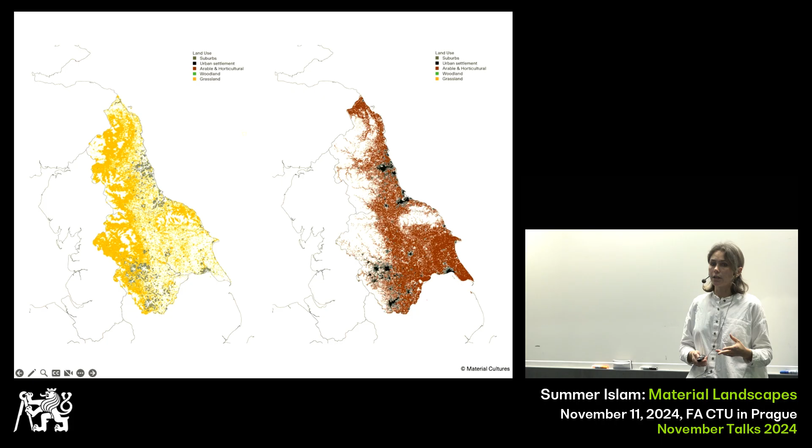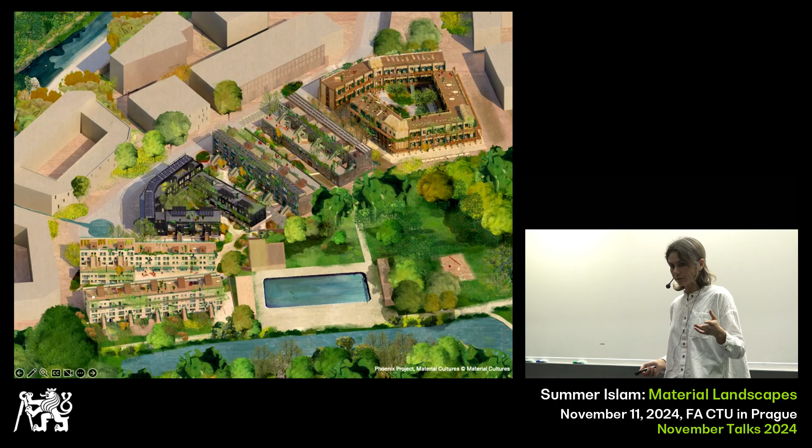Our work works through all these different scales. We work at the one-to-one, but also, as much as possible, we are interested in the impact of the work growing. So we work across large-scale housing developments, as well as hands-on fabrication and prototyping for design projects, but also working with our students to think about experimental and innovative building typologies with natural materials.

We teach, so we do lots of education work in architectural schools, but we also have a platform now called Make that we set up a couple of years ago, where we run building skills workshops, broadening the understanding and access to natural materials in construction and on construction projects.

As has already been said, we publish a lot of our work online and open source, but we've also recently published a book called Material Reform, which is a collection of essays looking at the destructive ecologies fostered by the construction industry.

Increasingly, the way we have come to conceptualize the work is to think about it in the context of the landscape, not just within which the project sits, but also from which the materials we work with are drawn. So I'm going to talk through a series of landscapes to articulate the project, and start to posit the connection that could be had between buildings and the landscapes they sit in.

So in farmland, we work a lot with straw. Straw, which is a stem of cereal crops, is very versatile. If you leave it in the field, it can be used for bedding, or it's often burnt, and then the carbon dioxide sequestered in the plant while it's growing is released back to the atmosphere. But by contrast, if you take that plant matter and integrate it into the building as a substitute for other materials, you could think of it very simply as a carbon battery or a carbon store.

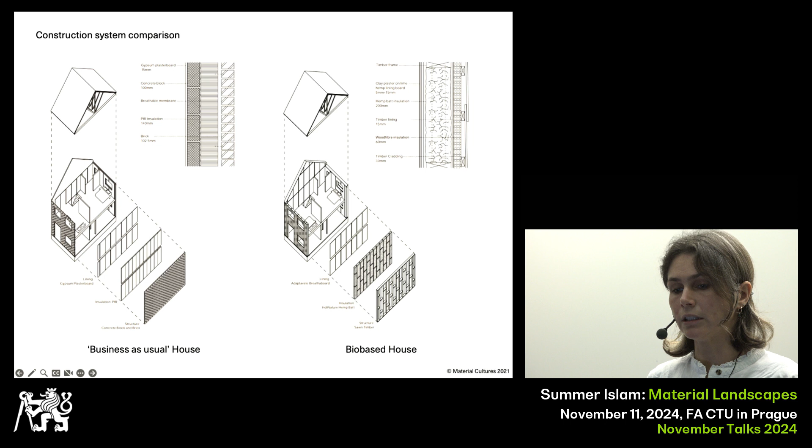So if you apply this logic to a house, in our research we found that if you substitute readily available plant-based building materials in a standard developer house like this one—buildings like this are built across the UK landscape—you could turn each individual house from a net producer of greenhouse gases to a kind of carbon negative unit of storage.

We've also looked at the amount of land you need to grow the plants required to do this work. What we found was that the land use is really negligible—it's a fraction of what's already going on there. There's lots of farming happening in the region more broadly, and the amount needed to produce materials to house the people looking for new housing is really, really small.

But the amount of economic gain for that whole region of the UK was massive, extraordinary. It's one of those things where you start to understand that this transition to a different material supply chain and a bio-based way of building is in lots of ways a no-brainer, and we're working at cultural barriers rather than technical ones.

Underlying this story of agricultural production is also one about how oil-dependent industrial agriculture has really desertified our rural landscapes. It's poisoned our soils and waterways and destroyed natural habitats, and you can see this in the biodiversity loss associated with extraction.

Surprisingly, most of this biodiversity loss is actually associated with farming. Today we're dependent on a handful of cultivars in our industrial farming landscapes and food systems, which makes them very vulnerable to pests, diseases, and also climate change.

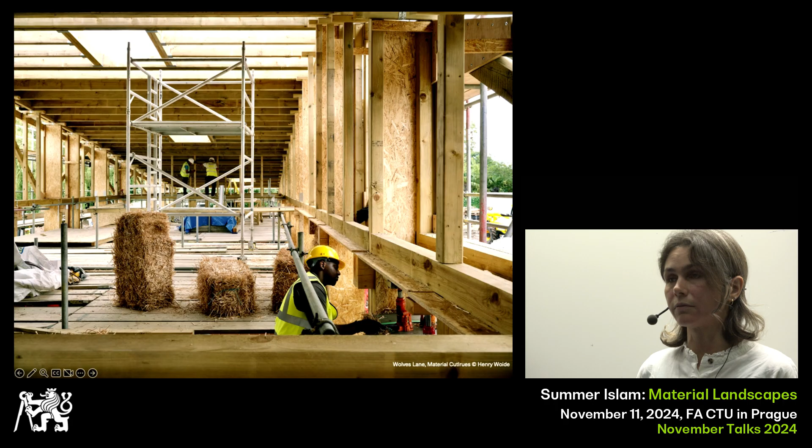The buildings were designed to be a tool for the learning and communication of the value of plant-based materials to the community. The project is rooted in principles of social justice, making spaces to practice, grow, and learn for those who have been historically marginalized in London.

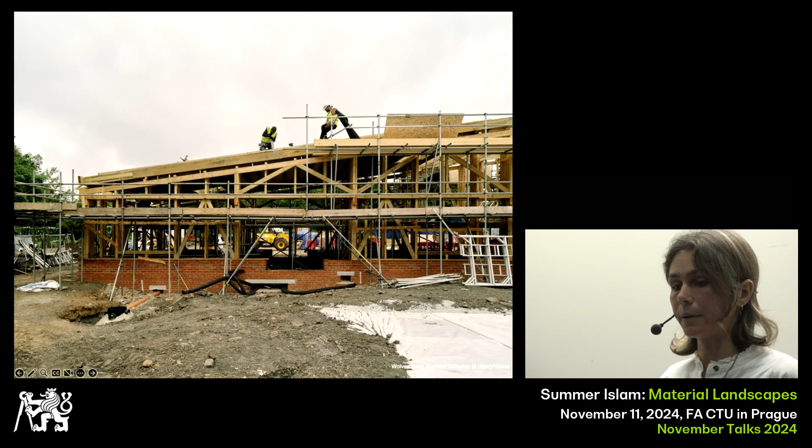Places like Wolves Lane are increasingly important as places from which to build community, knowledge, and enterprise. Through the project, we developed a participatory construction framework with apprenticeships, skills courses, and volunteer sessions. The construction has seen teams of different site users and volunteers exchanging knowledge and learning how to build together.

Direct contact with and understanding of materials, their properties, and what they feel like is at the center of how we approach design.

On this small dairy farm in Cambridgeshire, our client Steve Barron established Margent Farm. On the site, they looked at growing hemp for use in experimental biocomposite products, which could substitute plastics, basically. The same client commissioned this house called Flat House, a hemp-based flat pack demonstrator project which shows the versatility of hemp. The building takes the form of the existing steel frame barn and retains part of the structure to support a glazed hothouse and a climbing frame for the plants.

We established a new crop rotation. The hemp was sown in the fields which were previously wheat—it's actually a very good rotation between wheat and hemp. They kind of feed off each other.

And the very long roots of the hemp plant send carbon deep into the soil, but they also rebuild the soil structure. So it's a very good break crop.

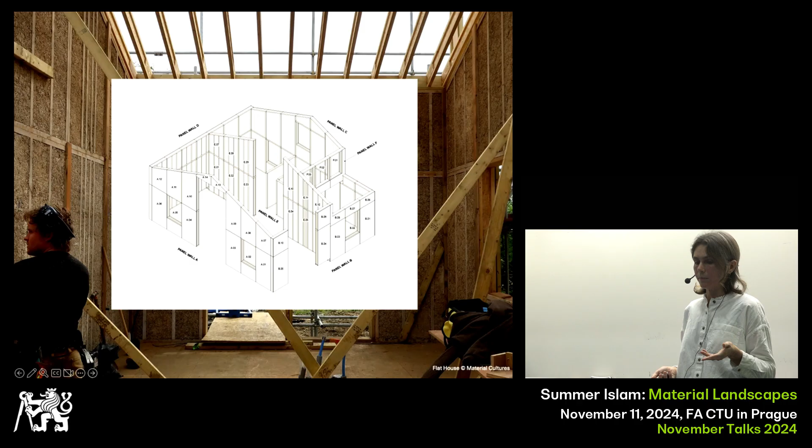And then it was sent to Buckinghamshire, where it was combined with lime and cast into these panels. We designed the system with our collaborators Will Stanwix and Oscar Cooper, and then we built the building with Henry Stringer very, very quickly, in about 2 days.

The cladding for the project was developed with Margent Farm, and then we made this new material product, which was one of the drivers for Margent Farm. It was combining hemp fiber with a sugar-based resin to make a corrugated rain screen.

And then internally, we worked to shift scales and, where possible, really just leave the hempcrete exposed so that it was something that was visible. Part of the way we think about materials in design is that when you can see them in the interior finishes, you have an understanding of how the building is put together, but you also have the ability to adapt, maintain, and intervene with the building throughout its lifetime.

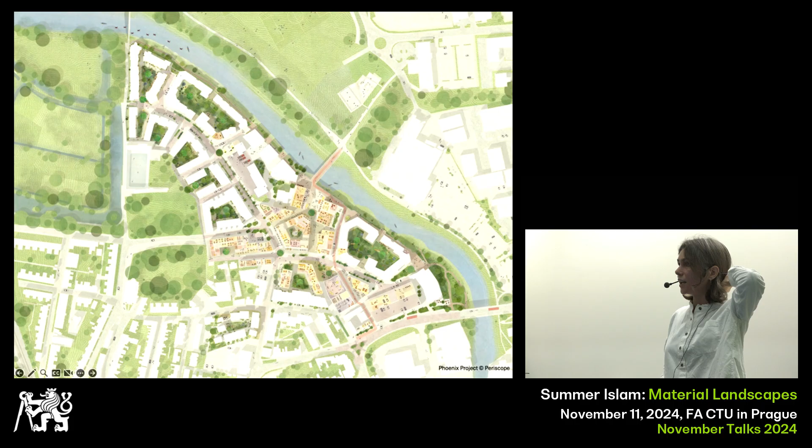And then the final farmland project is this one in Lewes, a development on an ex-industrial site in Sussex. We've been working with a developer called Human Nature, and they're rebuilding this big swathe of land across the edge of the river, making a new 700-home development. Our plot is these four blocks, making 70 homes, with the intention to make a 4 or 5-story timber frame and hempcrete building project.

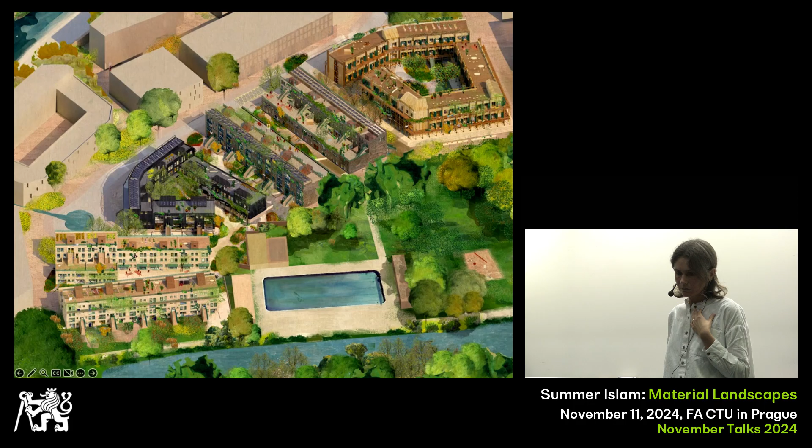Designed in a very dense urban configuration and arranged around shared courtyards and communal gardens, it's a series of very simple typologies that make varied building units, really thinking about different ways of sharing public space, from the communal garden to the deck to the terrace.

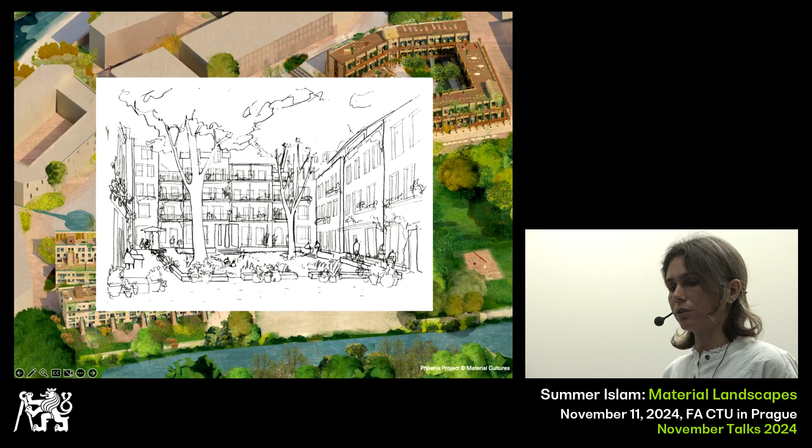We hope when we get to building this project on site - it's just got planning - that we'll be able to start demonstrating what's possible when you use these material systems at scale. Because we think larger scale projects are an opportunity to rebuild and re-knit the material supply chains we've lost, where we used to have more material processing and industry distributed across our countryside. But we've lost that, as it's become centralized and monopolized across the landscape of the UK.

We hope these projects are really an attempt to make a new language which is descriptive of the bioregion, that talks in the buildings about where they are, and is materially descriptive of the landscape around them.

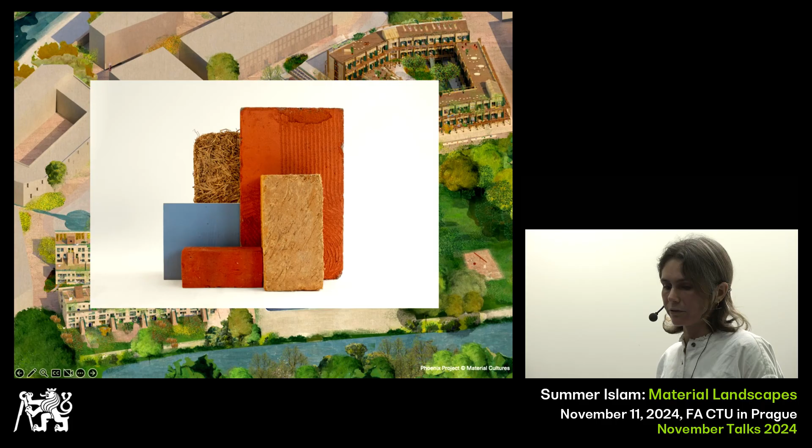When we build our structures, it's very hard for us to use anything other than timber - it makes lots of sense. So when we start working with timber, we look to the woodlands our trees are grown in. We think woodlands are a critical habitat for biodiversity and ecosystem restoration, but they're also intertwined in the UK with the history of common land that we lost access to. We used to be able to source multiple material streams from a forest, generating lots of different income.

But today, the forests of the UK are mostly privately owned, so you can't really walk through a lot of them, you have limited access, and we have no control about what's grown in them.

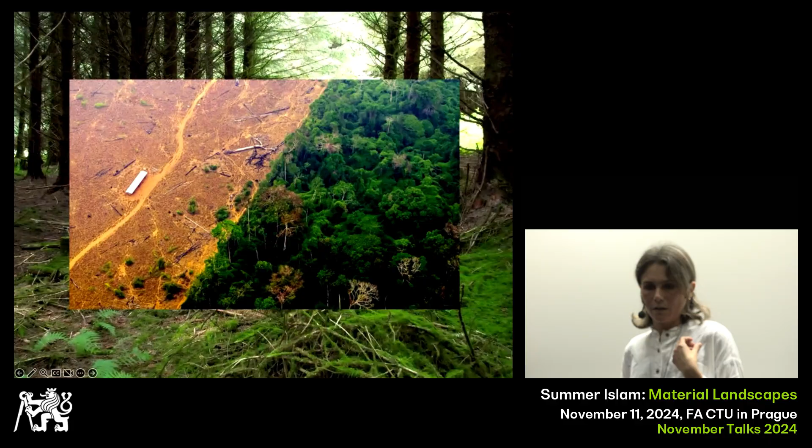Converting agricultural land to woodland can also be seen as the beginning of offshoring deforestation - plantation development in one place might lead to deforestation somewhere else. So when we think about planting new trees, we also need to think about the impact and tensions in the relationship between land uses and how we build.

Our starting question when we begin looking at forests is the critical role timber is going to play in decarbonizing global industries. How we meet that demand is really critical, and we think today it's going to be met by forests like this - engineered timber products formed from softwoods in plantation woodlands.

Monoculture plantations really deplete the soils beneath them. They have very limited biodiversity in their understory, and almost no resilience in the face of climate change. So our research has been speculating on what our woodlands and landscapes would look like if the way we planned our forests and forestry practices was designed around soil health rather than the needs of industry - and consequently, what kind of buildings might emerge from that, and what material language we'd have instead.

We did a piece of work at the Design Museum's Future Observatory, where we were fellows, investigating opportunities for resilient treescapes and regenerative land use management practices to repair the landscapes we have, which are degraded. So we looked at a future land use model - a mosaic alternative to monoculture landscapes.

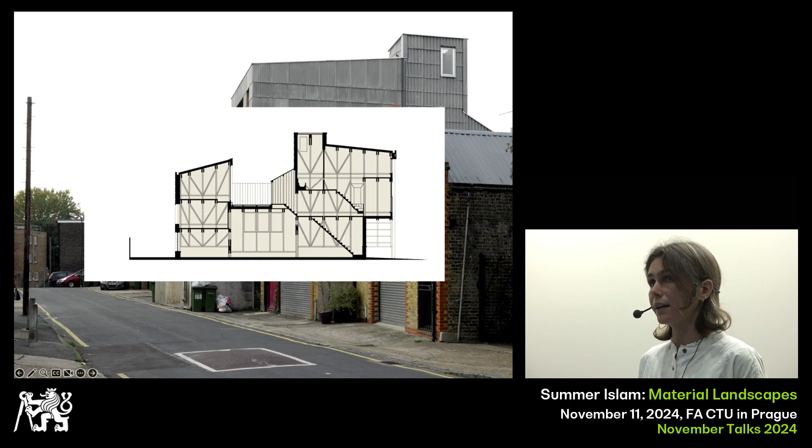It's a monolithic 3-story timber and hempcrete building, cast in situ, with a textiles workshop, 2 apartments and a raised external courtyard. It's a very flexible building, so you can occupy it in a series of different ways. We cast the hempcrete in situ, so you get very beautiful lines from the board shuttering when you do these lifts, like when you cast fair-faced concrete the traditional way, but much warmer and softer.

The design approach was intended to use carbon sequestering materials complemented by simple and very robust detailing. All the joints are fair-faced, side-fixed connections with the timber. The whole building — the frame, the floors, the skirting boards — were all made using exactly the same section of wood, quite substantial chunky planks, all sourced from one sawmill about 100 miles from the site.

The timber section was actually made bigger than it needed to be for the structure, to allow for charring in the case of fire, so we didn't have to use any chemicals to treat the wood. Because it was so large, it also enabled us to have a very unique timber structure — a kind of balloon frame with a 1.2 meter column spacing, and the floorboards spanned something crazy like a meter. It's much bigger than what you'd normally have in a Victorian terraced house.

The primary materials, because of their size and the way they're detailed, perform multiple functions at the same time. Because the floorboards are so thick, they're structural, but they're also acoustic, and they're the fire lining. We didn't actually have any ceiling, so you can see the floorboards below, and it eliminates the need for any additional materials for the soffit.

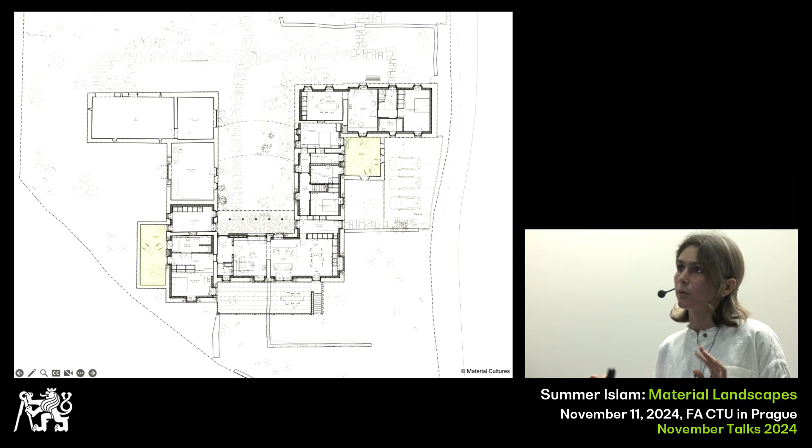The new landscaping, which was designed by J&L Gibbons, was intended to be a kind of restructuring of the temperate rainforest which you find on the north of the island, coastal meadows, and native tree species.

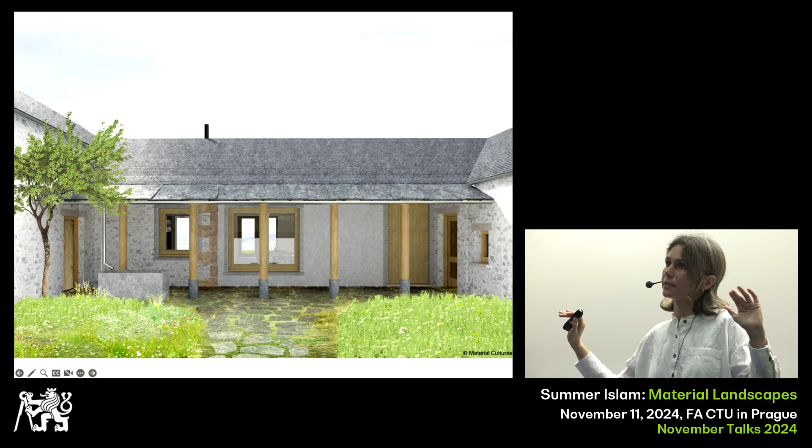At the courtyard side, we have this sort of oversized slate making a porch, which is supported by timber columns. And then internally, we lifted the gable on one side to make a kitchen and living room, which had a bit more generous head height and some kind of top light.

And where we can in the project, we're really working with the existing stone walls, which has been a learning process for all of us, because there's so much skill and knowledge in masonry.

We have a really excellent building surveyor called Kinley Laidlaw. He's got an innate understanding and lots of experience of working with stone, to the point that he knew to go to the nearby beaches to find the shells which would have been used in making the original mortars in the building, and was able to match exactly which beach the shells had come from in the making of the first lime to make the building.

And then we were able to replicate that process, not with these shells, but with other ones that were sourced more sustainably. But he also thinks about the work of the mason on site, which was a kind of revelation to us and sounds so obvious once it's put to you.

He's designed the work in the masonry as you move around the building so that it's not repetitive or boring to do, because it's very physically demanding being a stonemason. So he mixes up the tasks that the masons do so that they're not doing all the dressing at once, but they move between dressing and cutting and back again.

Our roofer, Hector Whitelaw, was very experienced and took all the slates off the roof and then put them back on again, resizing them and working with the original slates.

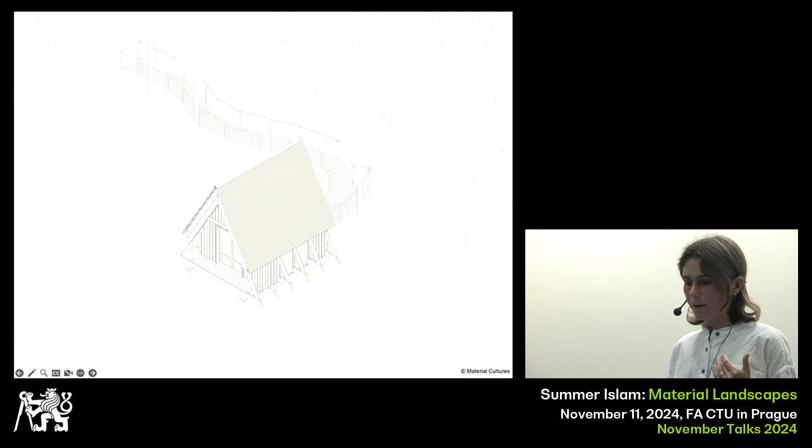We were looking at how you use the wood which comes from the forest we have today. In the UK, that means quite short sections of timber because our forests don't grow as tall as they do in mainland Europe, and also thinking about locally grown species of tree. We worked with 30 students on this building, so it was prefabricated by a very large team of students, and it worked specifically with timber affected by disease, so ash and larch. They're trees mostly affected by what you could describe as global pandemics exacerbated by climate change. The two diseases they're affected by proliferate in warmer climates.

So we worked with the ash and the larch, you can see them in green and orange, to look at how you mix timber in a building so that you work with shorter sections but combine them to make much more complex structures. The ash sits underneath the protected roof and then the larch protrudes from the envelope.

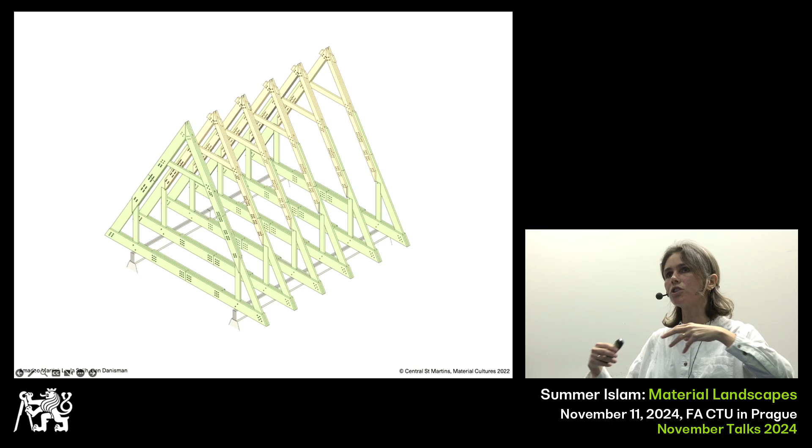Externally we clad the building in thermally modified timber, so it's been lightly baked, makes it dark brown, very chocolatey. Internally, wood fiber insulation and a wood wool lining board. This palette of materials is not really local to us. The timber frame is definitely one we could source locally, but wood fiber insulation is made in Central Europe, we don't have a factory in the UK. But we could. So really we think of these projects as galvanizing and building demand, and talking about why it's important to have that fabrication closer to home.

The whole building was fabricated in 7 weeks, prefabricated in relatively small but well-equipped workshops in King's Cross. Then it was taken up to Yorkshire and dry fit in the workshops of our contractor. Turned out it was actually really big, we didn't quite anticipate how tall it was going to be. It was ready to be installed while we waited for planning permission, which we finally got, and it's finally gone up last month.

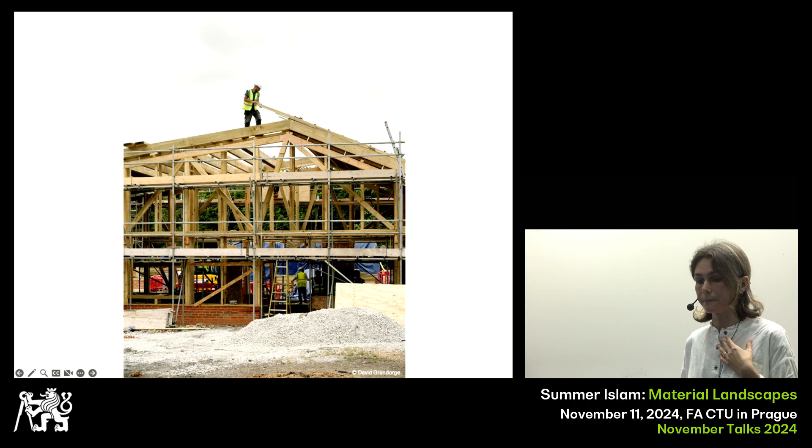Because we don't have that many trees we grow that are of that structural capacity, if we mix the specification with a number of different tree species, we can start to pressure the supply to be from more diverse types of woodland. We also try to minimize how much timber we use as much as we can, and we try to avoid boards and laminated products which have chemical glues and coatings. This is more difficult to do, but they do end up downstream in our waterways. Designing for reuse means using very simple fixings, and where possible, making those fixings out of timber to extend the lifespan of the building.

We see our built projects as opportunities to build new supply chains and processing infrastructure, expanding really the understanding of our role and responsibility as architects who work with materials which are inextricably linked to these landscapes of extraction.

And the last landscape we started looking at is the wetland. It's kind of a landscape of potential, and it's a very hopeful place in lots of ways. So swamps, marshes, fens and wetlands were historically identified as areas of mystery and threat. They were wastelands with no inherent benefits to human populations. But they're incredible places. They are important migratory zones for birds, carbon sinks, and buffers against flooding. But we used to think of them as untamed nature, which needed to be transformed into villages and productive farming land.

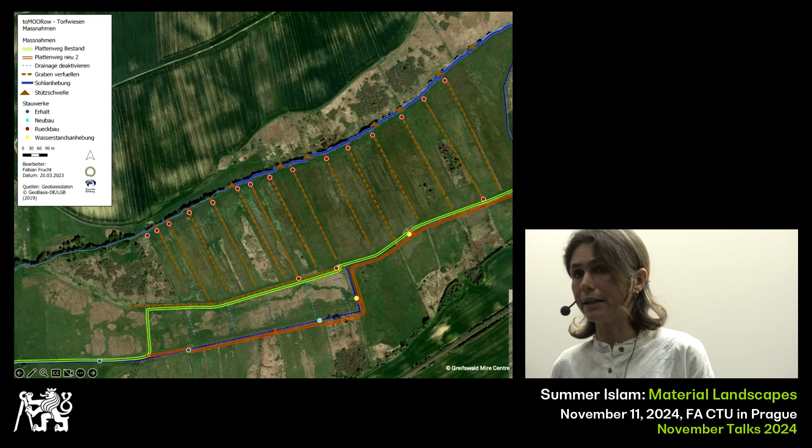What we think is exciting about the wetland context is that there's a means of pairing landscape regeneration and material production that's not in conflict. In Brandenburg, vegetable growing, grazing sheep and cows had to be replaced by something, and what they've replaced it with is farmed water buffalo. Water buffalo are a bit like cows, but much better at being wet — they have hooves and a physiognomy adapted to a wet landscape. They're critical to the ecosystem because they eat all the young trees and shrubs which would change the landscape from the wetland it is. They maintain it as open wetland, and also have an active role in fertilizing and maintaining the landscape.

In material terms, we looked at what kind of reeds or paludiculture crops — basically wet crops — could be farmed by local farmers to their benefit, in terms of the landscape and their economy, but also maybe for use in the construction industry. We worked with different manufacturers, farmers and conservationists to understand what material supply chains already existed, because people have been doing this work for decades. There's loads of really interesting research already, but then thinking about how they could scale, and how as architects we can start to have a role in growing that industry by specifying these materials.

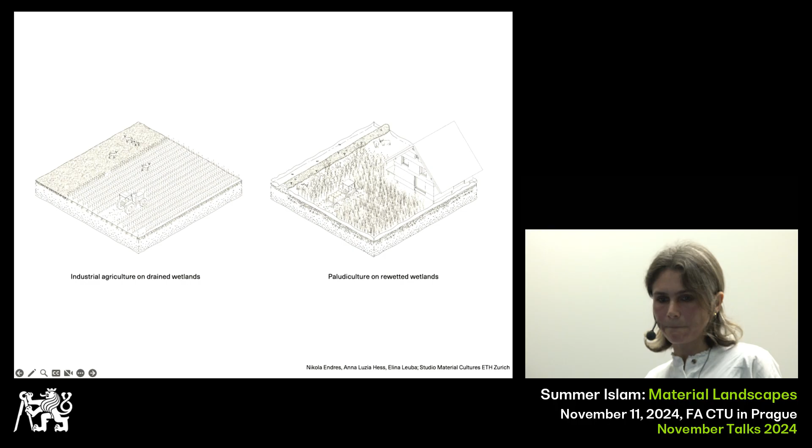Teaching is sort of integral now to our practice. We work with our students to make buildings and design buildings, but also work at the one-to-one scale, designing regenerative building systems. This was a fragment designed by our students at ETH last year, made entirely with products from the wetland - bulrush, or typha, or cattail, and reed. All of the materials in this building system, probably apart from the screws, come from the wetland.

When we work with our students, we always work in groups to understand the materials we're looking at, how they perform, and how you can build with them. And with these skills, we then make the fragments together.

This one is looking at the possibilities of eelgrass, which comes from coastal landscapes, as a kind of insulation material. We don't really focus in our teaching work on the program of the building, much more on the building systems and how they could be applied.

Reed, this common wetland crop you see at the edge of lakes and ponds, is common practice in thatching. So we're all kind of familiar with it in roofing.

But straw, which is really appropriate for thatching, is very rare now. We use fertilizers when we grow wheat, which we used to thatch with, and that really weakens the stem of the plant. It grows too fast and becomes very brittle. So if you wanted to buy reed, for example, you would almost certainly have to import it from Turkey.

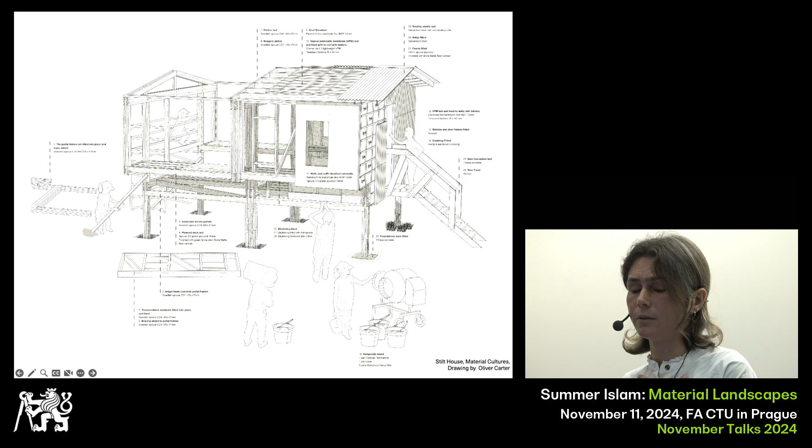Ultimately, we now believe that in order to make meaningful change in the construction industry, we have to accept that there aren't any easy answers, and that all construction practices cause harm and all require compromise.

We think this requires the reimagining of how we use land at a local, regional, and national scale, but it also offers us a chance for economic and social renewal and a refiguring of how we live together on the land.